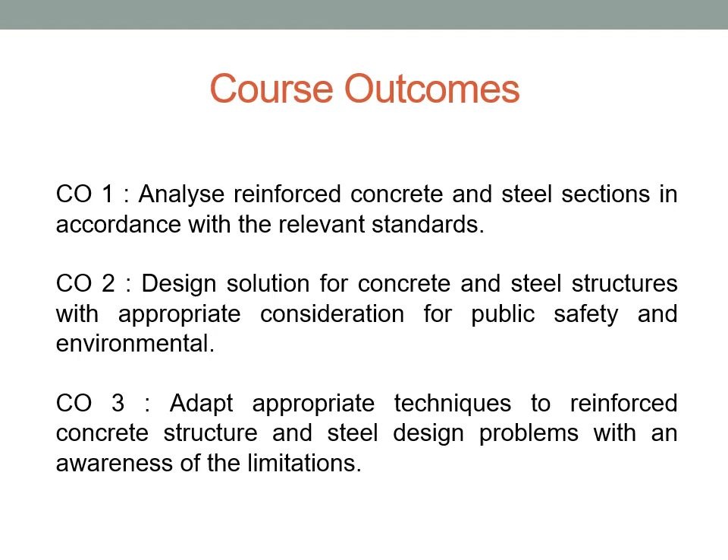Alright, for today's lecture, we are going to move to another chapter, which is chapter 3 on structural steel design according to Eurocode 3. For today's lecture, we are going to touch on the introduction part of the steel design. Course outcome is on CO1, CO2, and CO3, which is aligned with the programme outcomes PO2, PO3, and PO4.

The learning outcomes: at the end of this lecture, you are able to understand steel as a structural material, and then you need to describe the differences between the ultimate limit state and also serviceability limit state according to Eurocode 3.

Okay, what is steel? Steel as a construction material is actually an alloy consisting mostly of iron with carbon content between 0.2% to 2.14% based on weight, and the variation of the content depends on the grade of the steel. Some steels have other elements that influence the grade of the steel, for example magnesium, manganese, silicon, phosphorus, and aluminum.

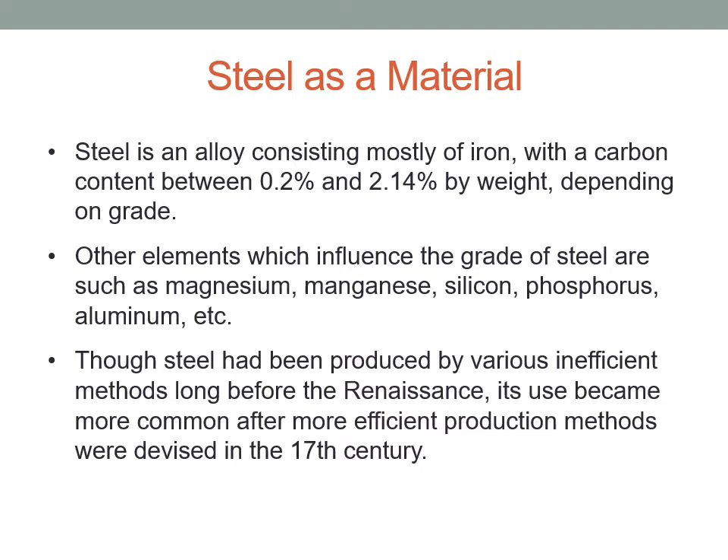Steel was produced by various inefficient methods long before the Renaissance, but it became more common after the 17th century. For production of steel, all the material is combined in a furnace to become molten steel, and the output of this process is ingots. From the ingots, we reheat the steel to red hot, and then it goes through a rolling mill to become a section of the steel member. So we have beam section, hollow section, channel, angle, and also plate.

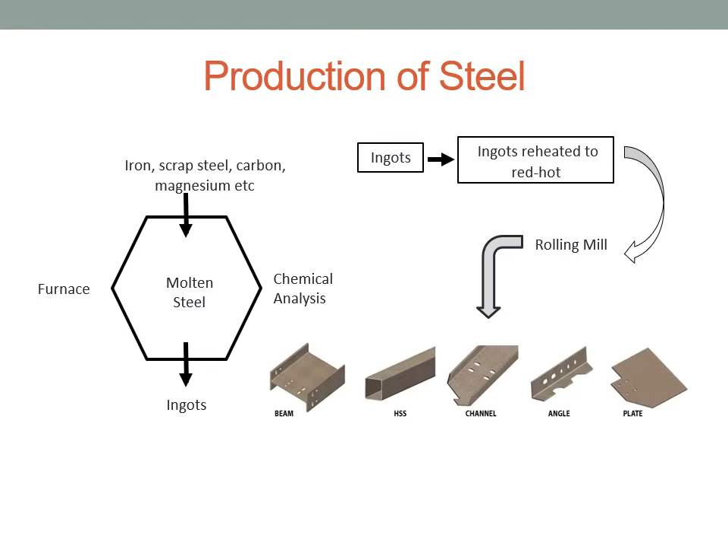The advantages of steel are due to the high strength of the steel as compared to its weight. Also, steel can be prefabricated, and it has advantages in ductility and elasticity. Steel is also tough as compared to concrete, so we can add more load to the steel, and steel can be used as permanent structure and also as an addition to an existing structure.

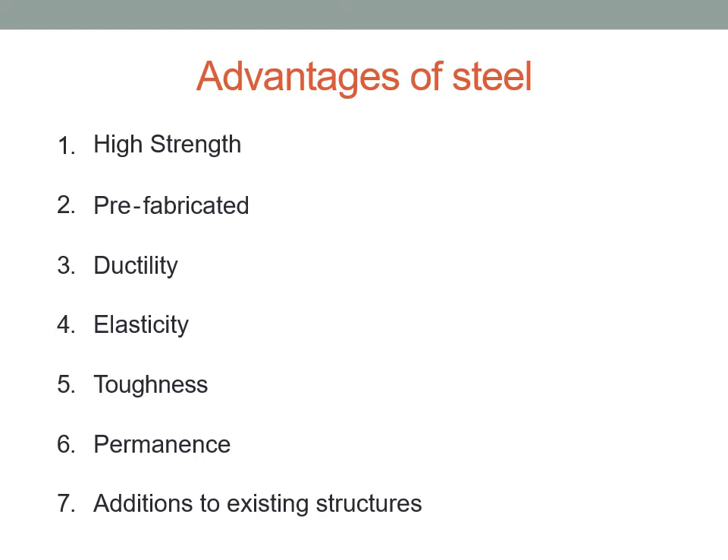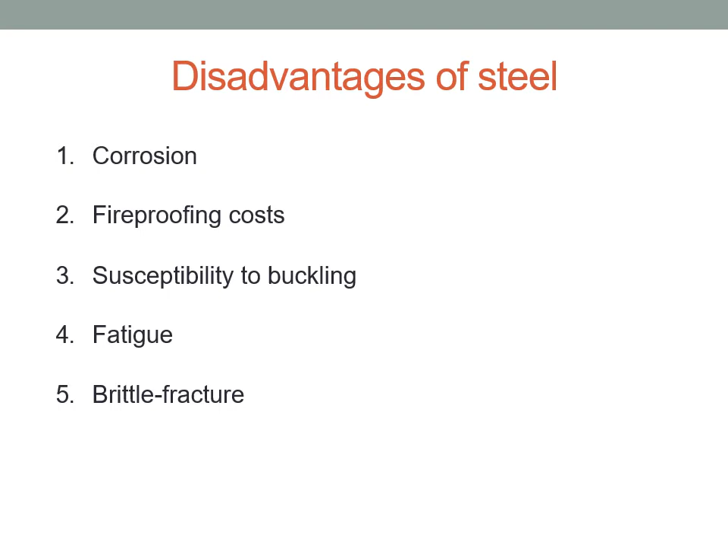The disadvantages of steel: the first one is corrosion, and also because steel loses its strength at high temperature, we need extra cost to put fireproofing elements on our structure. Steel is also susceptible to buckling as compared to concrete structures. Steel also has disadvantages in terms of fatigue and brittle fracture.

What are the types of steel structure that we have? Normally, steel structure can be used as building frames, where loads must be supported safely and without undue movement of the frame. A weatherproof envelope must be attached to the steel structure. In building frames, the steel frame consists of a skeletal framework which carries all the loads of the building. The common types of steel frame building are shown below.

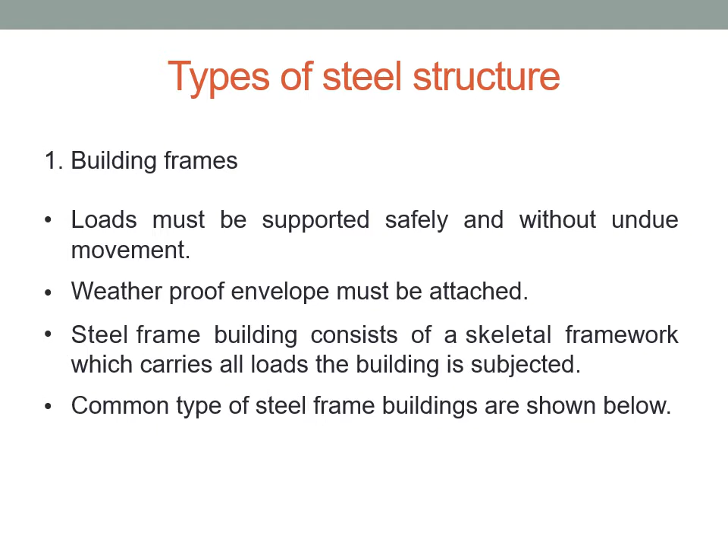The first one is a single-story lattice roof building with crane, and we also have single-story rigid pin base portal and multi-story building. In a steel frame, we have floor beam, plate girder, column, bracing, haunched joint, and also crane girder. These are all the elements that we have in frame buildings.

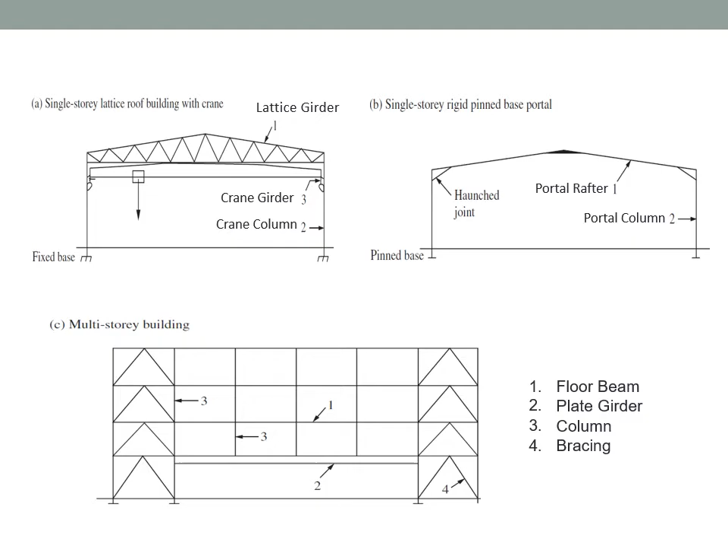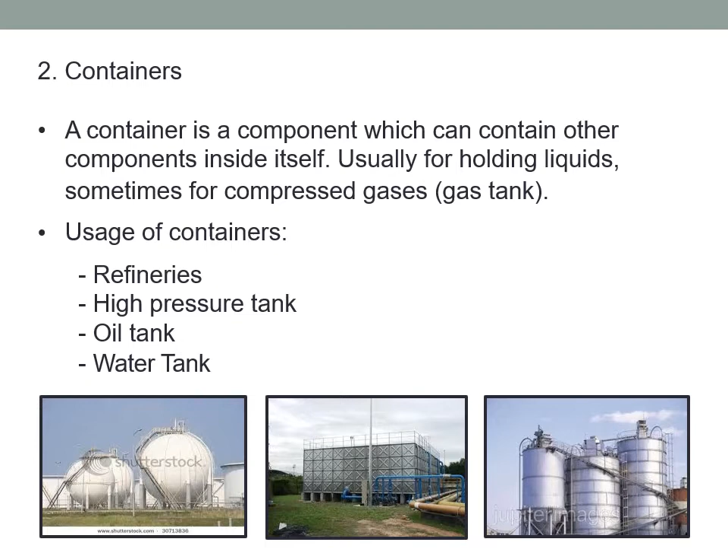The second type of steel structure is containers, which are components that can contain other things inside themselves, such as holding liquids or gases. Containers are used for refineries, high pressure tanks, oil tanks, and also water tanks. Steel can also be used for masts, chimneys, and bridges.

A bridge is a structure built to span physical obstacles such as a body of water, valley, roads, or river. The purpose is to provide a passage over the obstacle. Design of bridges varies depending on the function of the bridge, the nature of the terrain where the bridge is constructed, and also the material used for the bridge.

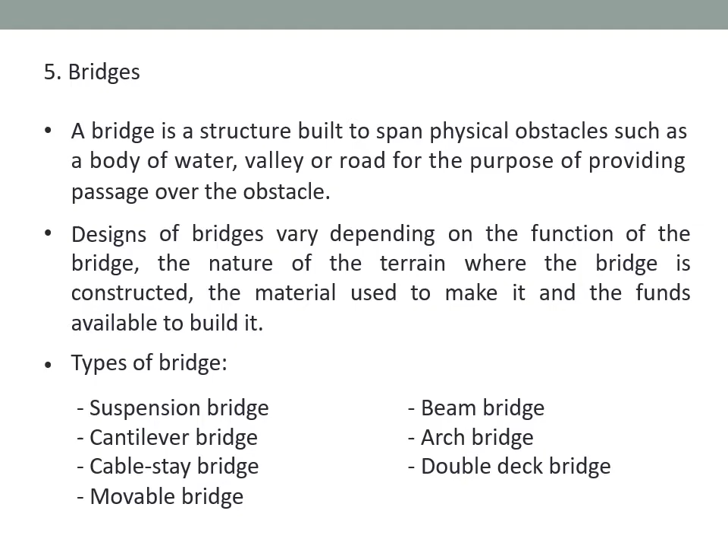Another type of structure using steel is temporary support. Temporary support is required to secure any elements of the steel framing only until they are made stable without external support. After that, we can remove the temporary support. Examples of temporary support are scaffolding and also shoring.

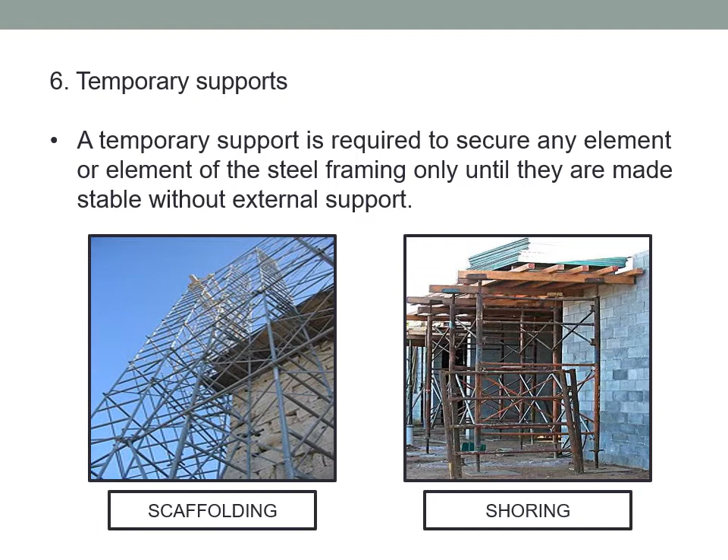Alright, so let's look into what are the elements of steel structure. The first one we have beam and plate girder. Beam is a member carrying a vertical action from above, and it reacts in bending and shear. A girder is actually a beam, a fabricated beam formed by the welding of plate together with I section. This is an example of plate girder, which is we have plate on the top of I beam.

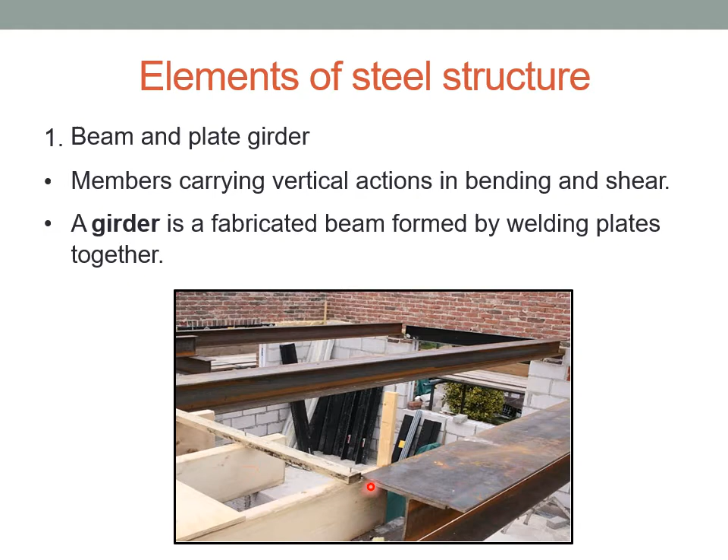And then we have another type is ties. Ties is any strong component designed to keep two objects closely linked together. The members carrying axial action is in tension. So this is a tie. Basically, we use for trusses.

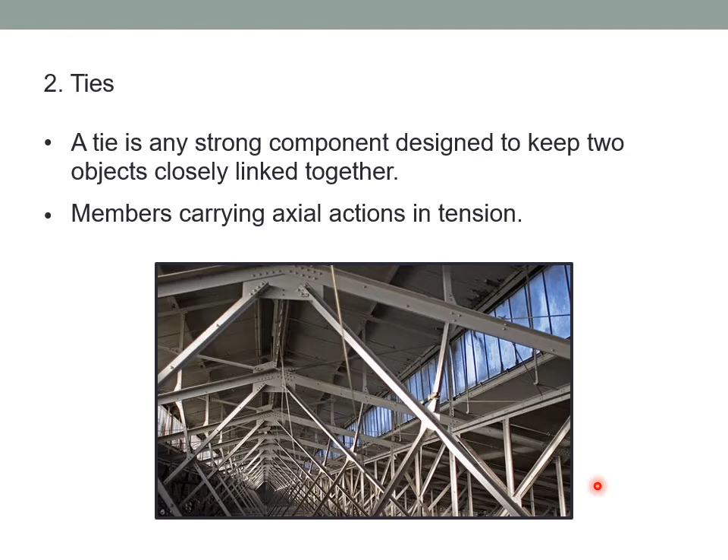And also we have strut, column, and stanchion. Strut is compression member. Normally we use as bracing. And the column is also compression member, mainly supporting a vertical compression member. And stanchion is main vertical compression member in portal frame. So let's say you have a portal frame. Portal frame, basically you have a column and beam connected together.

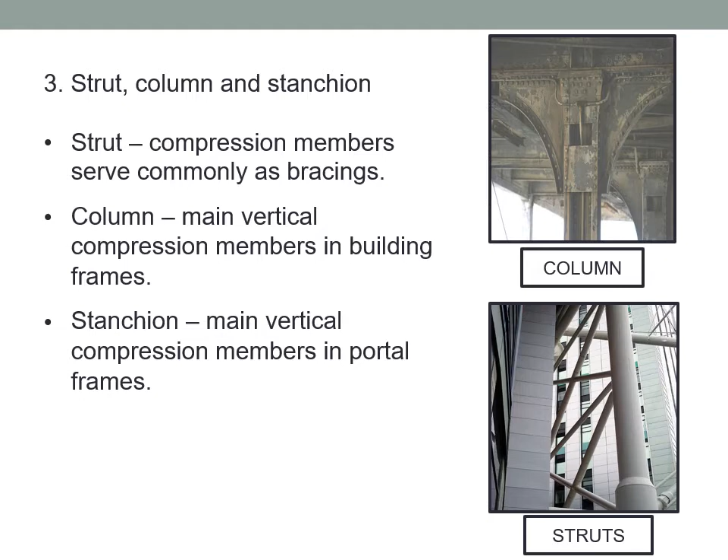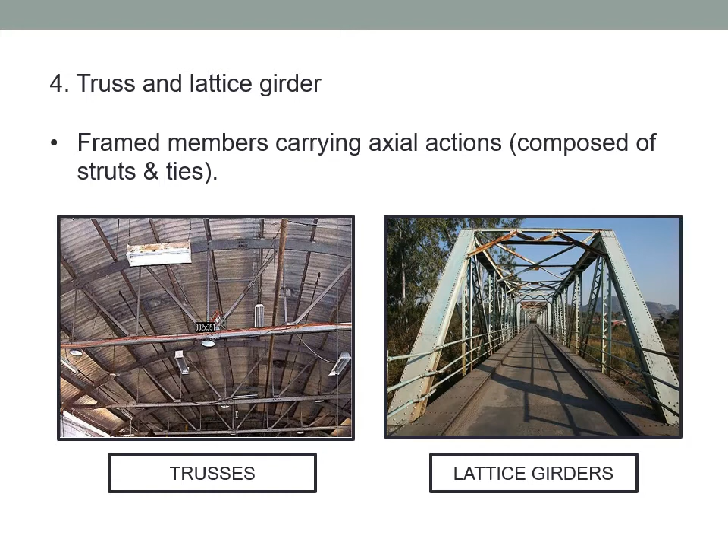And then we also have truss and lattice girder. Truss and lattice girder normally on a frame structure that the frame members will carry axial load, which is composed due to struts and also due to ties. A combination of strut and ties become trusses and lattice girder. This is example of trusses, and here lattice girder used in a beam in bridges.

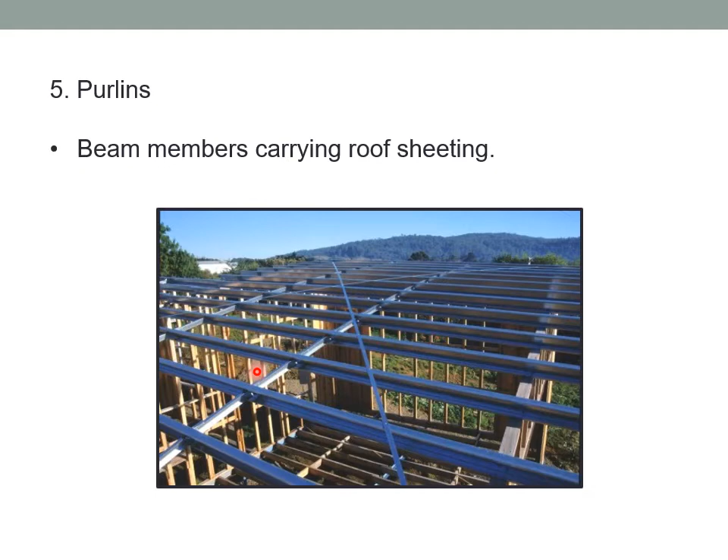We also use steel member as purlins, which is a beam member that carries roof sheeting. So normally the strength of the purlin is low as compared to the actual beam. Okay, we use it only to support the roof sheeting.

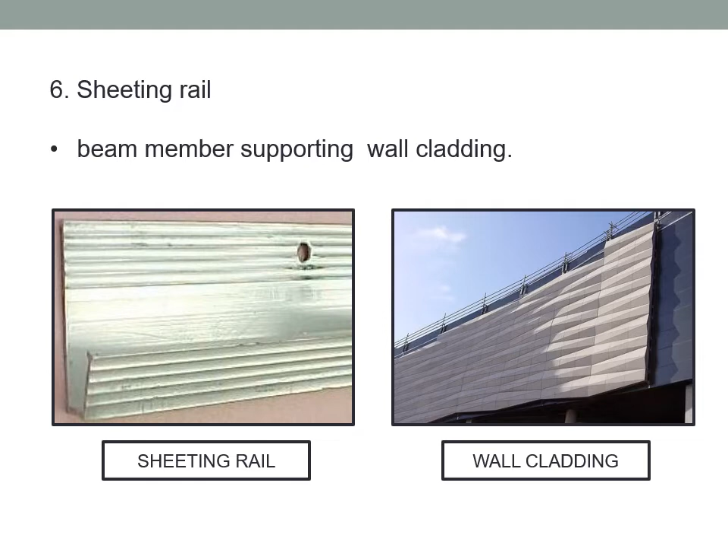And steel is also used as bracing. Bracing is actually a diagonal strut and ties. This is what we call as bracing. Together with column and roof trusses to form vertical and horizontal trusses to resist wind or horizontal forces. The function of bracing is actually to stabilize the building.

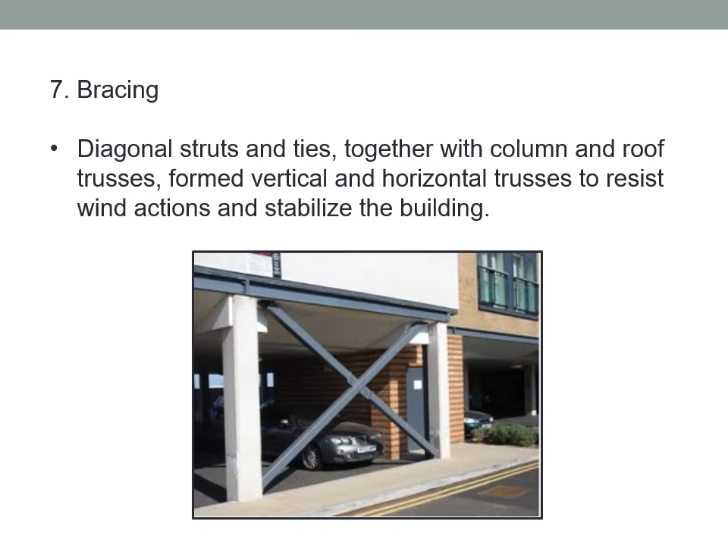And these structural elements must be joined together and the building must be attached to the foundation. The joint actually connects the members together. For example, we have joint in trusses, joint between floor beams and column, and also beam to column joint. And the joint will be transmitting the load, let's say from beam to column and then to the foundation.

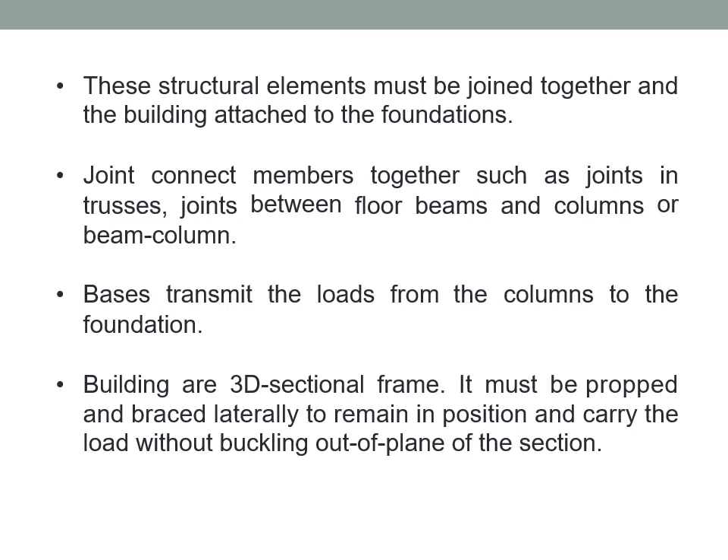Okay, so let's move on to the structural steel section. The main section is hot rolled section, which is we produce a section by hot rolling of steel billets or blocks of steel in a rolling mill. So the most common type of hot rolled section is universal beam. The shape of the universal beam is I shape, and sometimes we call it I beam. And also we have universal column. The shape of the column is actually H section. We also have hot rolled channel section, C section, and also rectangular and circular hollow section or equal angle.

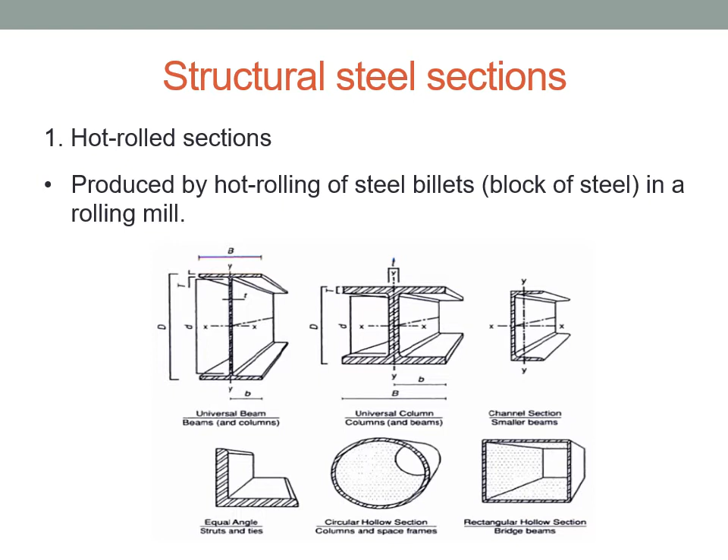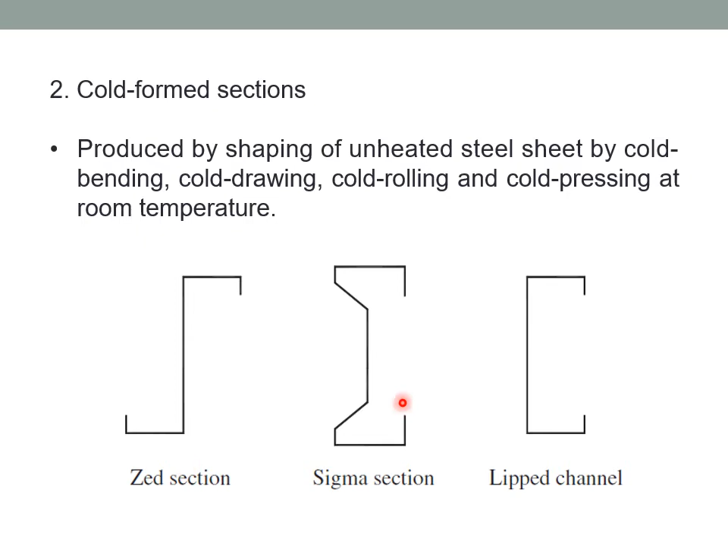And another type of steel is cold formed section. For cold formed, the steel is produced by shaping of unheated steel sheet by cold bending or cold drawing or cold rolling at room temperature to become a formed section. For example, let's say we have a steel plate and then we shape it into Z. And we call it Z section, and also we have sigma section and also lipped channel.

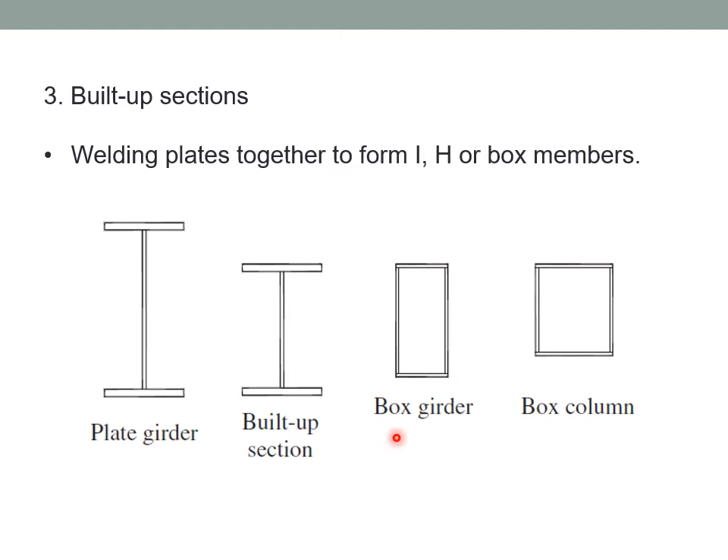And we also have what we call built-up section. For built-up section, we weld the plates together to form the shape of I, H, or box member. Okay, so sometimes we have plate girder, built-up section, box girder, or box column. And also we have steel section that we call metal sheet. Normally used for composite construction as a permanent formwork for slab.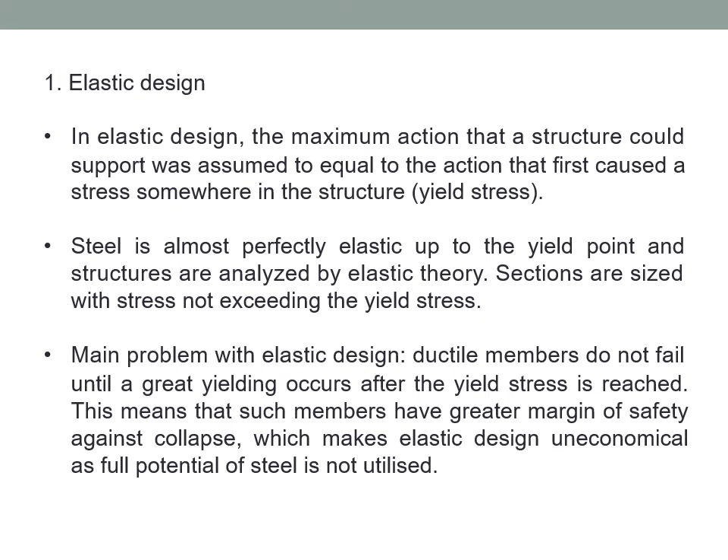The main problem in elastic design is that steel itself is a ductile material, which normally does not fail due to yielding. When it reaches the yield point, normally the steel still does not fail. So it means that the margin of safety for the steel structure is still high. So it makes the design uneconomical because the full potential of steel is not utilized.

And next we have what we call plastic design, in which we consider the plastic state of the steel. The advantage of this is we can take the unique property of steel, which is ductility, and we take into design the behavior of the steel after the yield point until it collapses or fractures.

The plastic design will also take into consideration the long yield, which allows the possibility of plastic strain at constant stress. However, in reality, the structure can fail not only due to failure of the material, but also due to excessive deformation. It means that when we apply load, the steel may still be strong, but the structure has actually failed due to deflection of the structure. Therefore, another design theory that we introduce is limit state design.

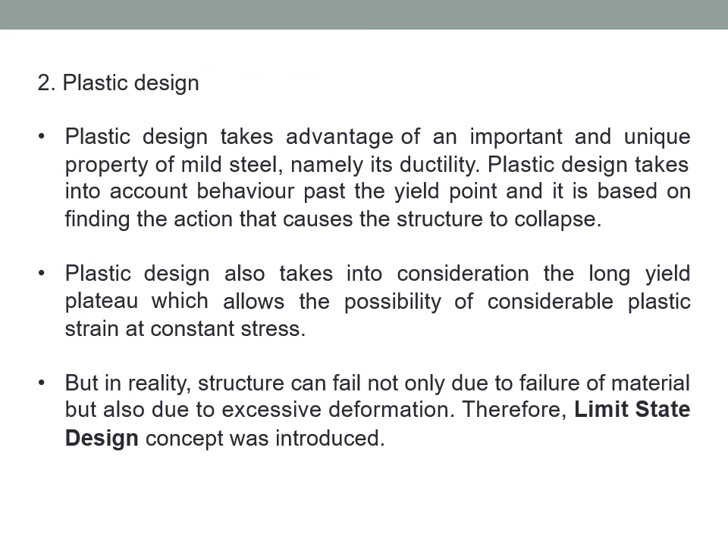In limit state design, we have the serviceability limit state, and also the ultimate limit state. Basically, this limit state is quite similar to the one that you have done in concrete design, which is in serviceability limit state, we design for the deflection of the structure or vibration induced by the wind or damage due to fatigue, and also in terms of corrosion and durability.

In serviceability limit state, when the limit is reached, the whole structure or a part of it is unfit for normal use. However, at serviceability limit state, the structure does not collapse. It just cannot be used. Does not collapse, but cannot be used.

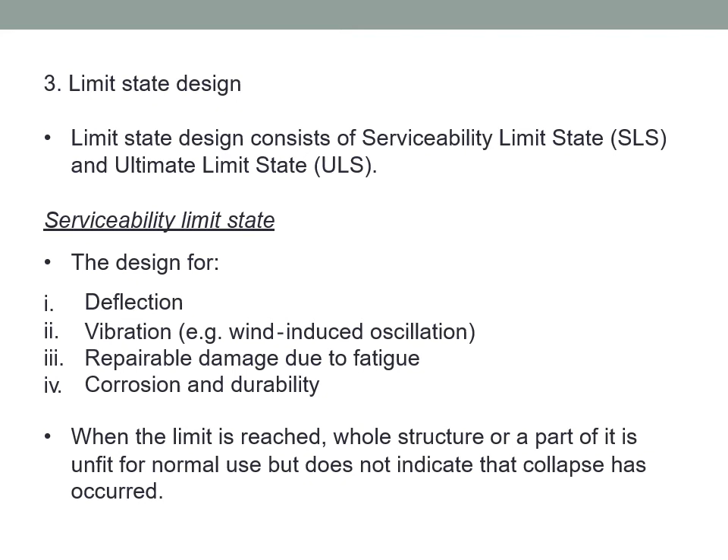And for ultimate limit state, we design for the strength of the structure, for example, for yielding, rupture, buckling, and also the transformation into a mechanism. At ultimate limit state, you also design against overturning and sway of the structure or fracture due to fatigue or brittle fracture, and also a ductility check. At ultimate limit state, when the limit is reached, the whole structure or part of it may collapse. Okay, so that is the difference between the serviceability limit state and the ultimate limit state.

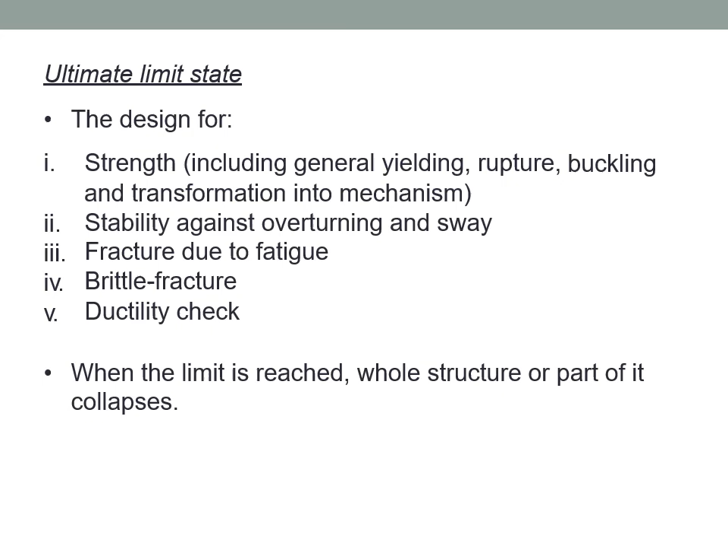So basically in Eurocode, we have first EC0, which is on the basis of design. This is applicable for all the Eurocode series. And then we have EC1, which is on actions or loading on structures. And then we have a code for each material. So we use EC2 for concrete and EC3 for steel. And also there are other series of Eurocode for different purposes.

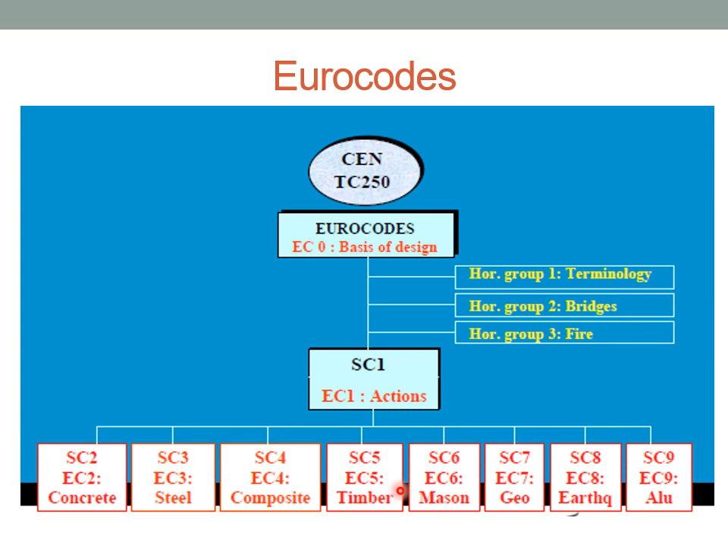So action on structure for steel design is actually similar to the one that you have done in concrete design, which is you are going to have a permanent action and also variable action. Permanent action is actually a constant loading during the life of the structure, what we call dead load. It includes the fabric of the structure or any architectural components such as cladding, partitions or ceilings that are fixed to the structure. It can also be any equipment or static machinery.

And variable action is load that varies with time, or what we call imposed load or live load. For example, occupants, furniture, snow, retained water, thermal expansion, shrinkage, and so on.

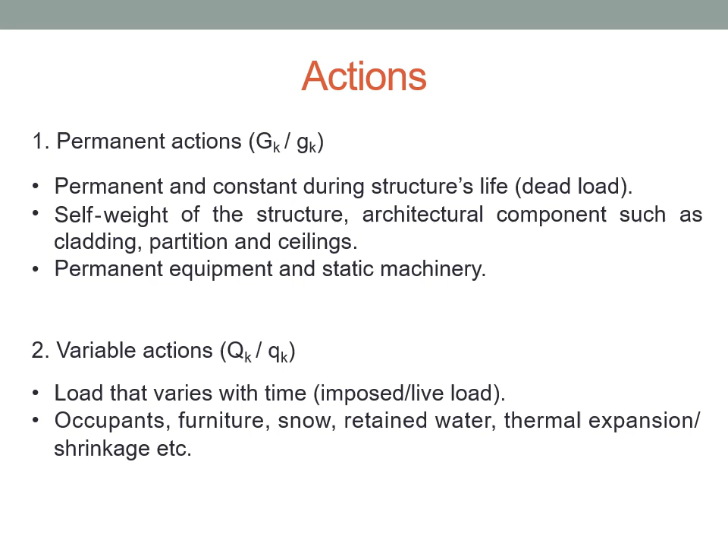And the load factors for design of steel are quite similar to design of concrete. So the expression that we use is 1.35 Gk plus 1.5 Qk. So that is what we use for general design, unless we are going to extend our design for wind loads or snow load, then we need to add other variable factors.

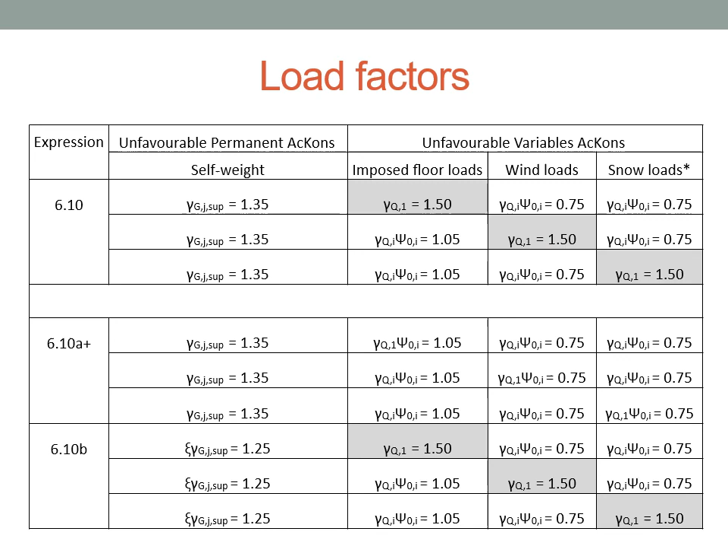Alright, so that's all for the introduction of steel design. Next class we are going to continue on the design of steel beams.